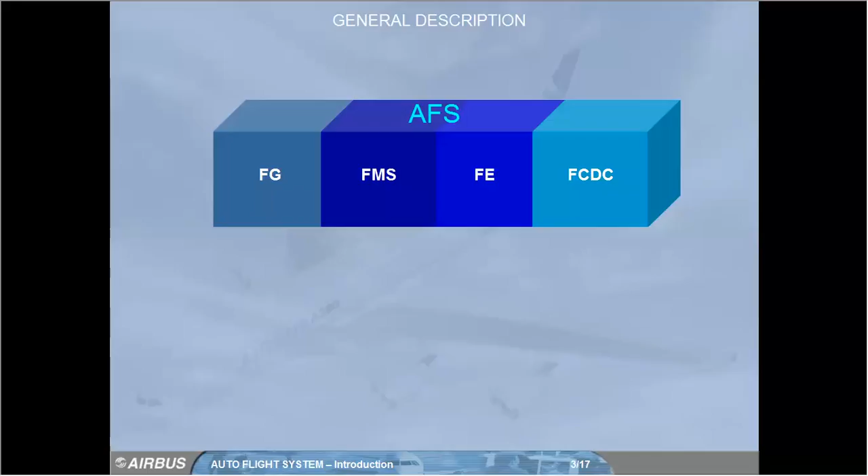The Auto Flight System includes the Flight Guidance, FG, system, the Flight Management System, FMS, the Flight Envelope, FE, and the Flight Control Data Concentrator, FCDC.

The flight guidance provides lateral and vertical guidance, including speed or Mach control, in accordance with targets selected by the flight crew, or managed by the FMS.

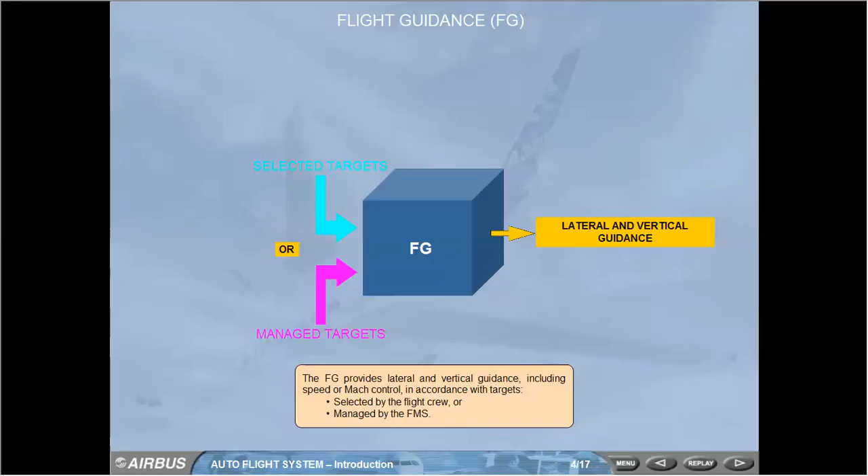To set targets, the flight crew selects inputs on the Auto Flight System Control Panel, AFSCP. These selected inputs go directly to the flight guidance for immediate guidance response. This is called selected guidance. The AFSCP is a short-term interface.

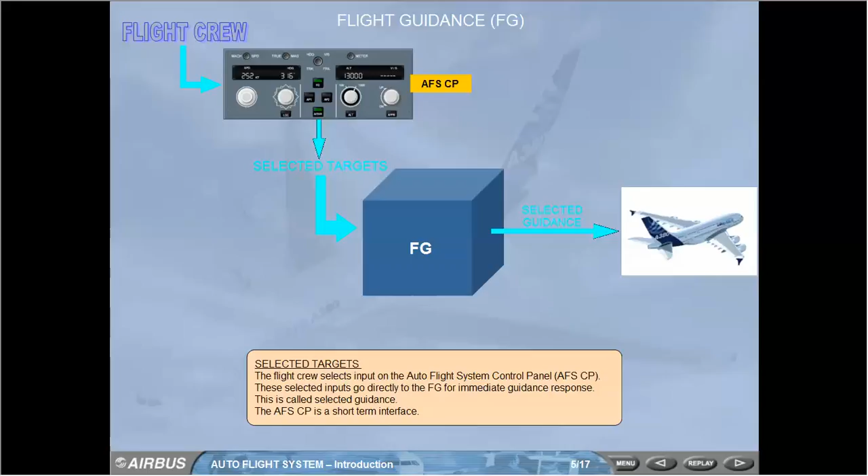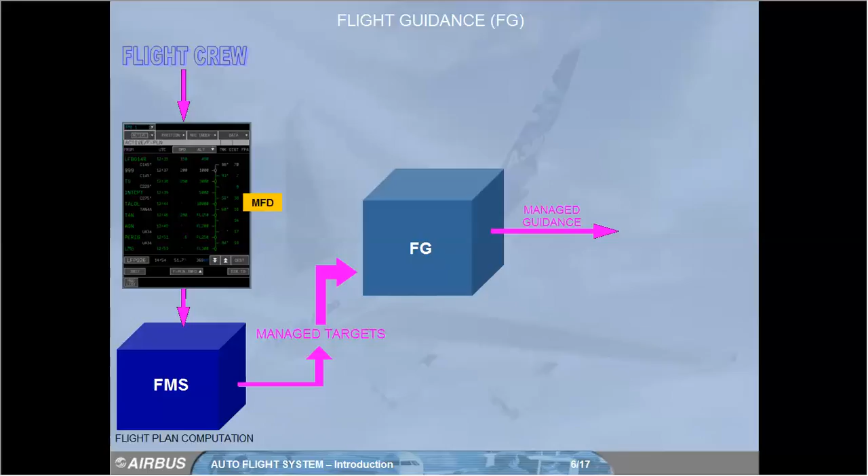The flight crew inserts the flight plan into the Multifunction Display, MFD, ahead of time. The FMS computes and manages these targets for the flight guidance. This is called managed guidance. The MFD is a long-term interface.

Lateral and vertical guidance can be either selected or managed, independently of each other. However, managed vertical guidance is not possible when selected lateral guidance is used. Note, speed or Mach can be either selected or managed, regardless of lateral and vertical guidance.

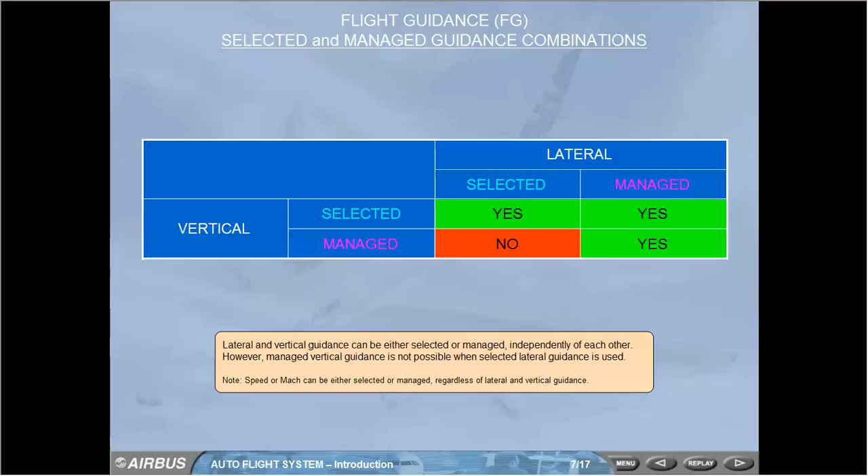On the AFSCP, the speed Mach, heading track, and altitude knobs can be turned, pulled, and pushed. This enables the flight crew to pre-select or select a target by turning, engage a selected guidance by pulling, or arm and engage a managed guidance by pushing. When in managed guidance, the flight crew can take over control at any time and change to selected guidance. Note: the vertical speed flight path angle knobs can only be turned or pulled.

The result of any action on the AFSCP or on the MFD, whether manual or automatic selection, should be confirmed on the Flight Mode Annunciator, FMA, of the Primary Flight Display, PFD.

In order to achieve lateral and vertical guidance, including speed or Mach control, the flight guidance uses the autopilot 1 and or 2, AP1, AP2, the flight directors 1 and 2, FDs, and the auto thrust.

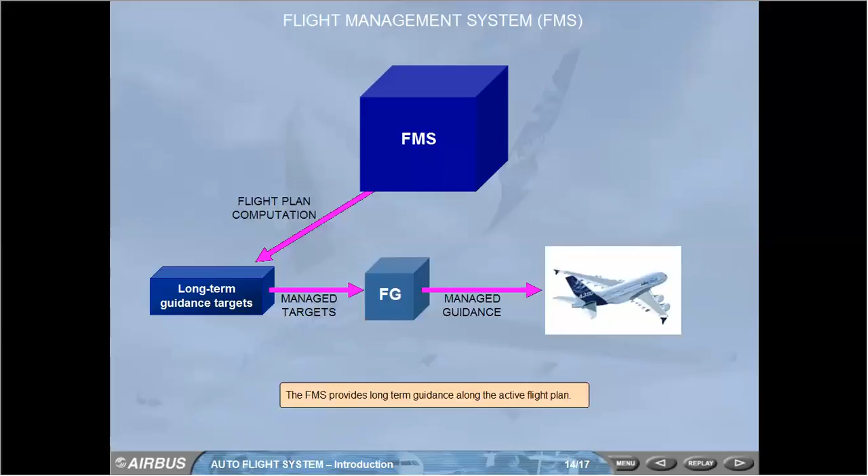The FMS provides long-term guidance along the active flight plan. In addition to long-term guidance, the FMS provides flight planning.

The flight crew can create a complete flight plan, lateral and vertical, navigation, aircraft position, position accuracy and radio navigation aids tuning, performance computation and optimization. Information is displayed on the MFD, Navigation Display, ND, and PFD.

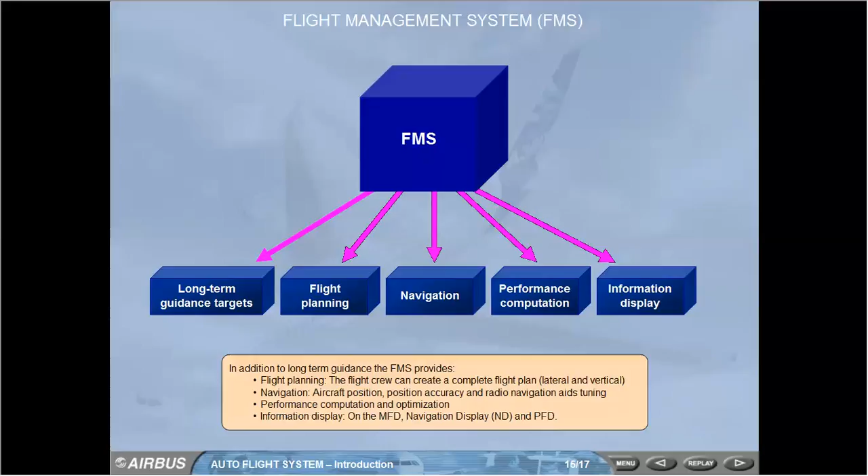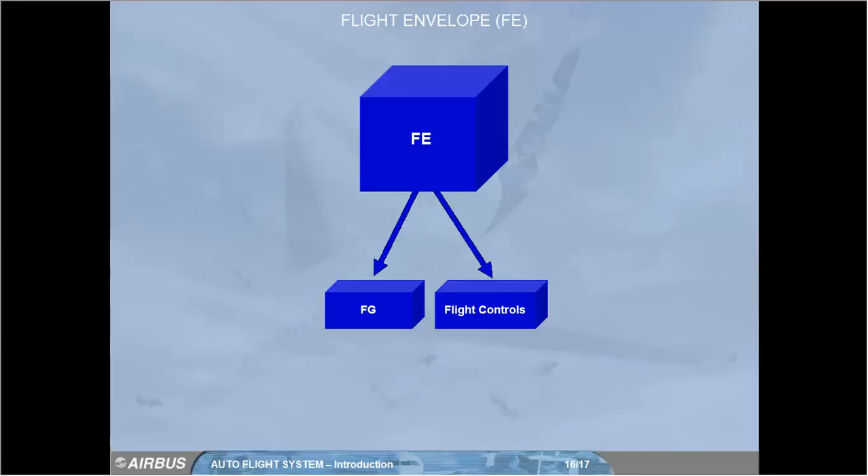The Flight Control Data Concentrator, FCDC, determines the automatic landing capability for the autoflight system, in accordance with the availability of the equipment required for automatic landing. It interfaces the autopilot, flight director and auto thrust with the Flight Warning System, FWS, to allow the associated alerts to be triggered, and generates maintenance messages for the flight guidance and flight envelope.

The FCDC also performs functions for the flight controls.

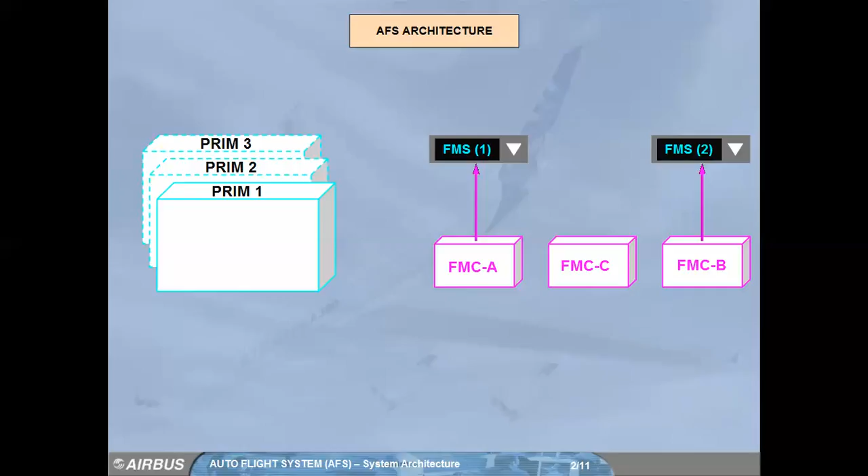The system has 3 primary flight control and guidance computers, PRIMs, and 2 flight management systems, FMS-1 and FMS-2. Each FMS is operated by one of 3 flight management computers, FMC A, FMC B, or FMC C.

The 3 PRIMs control the flight guidance, autopilots, flight directors, auto thrust, the flight envelope, FE, and the flight controls functions.

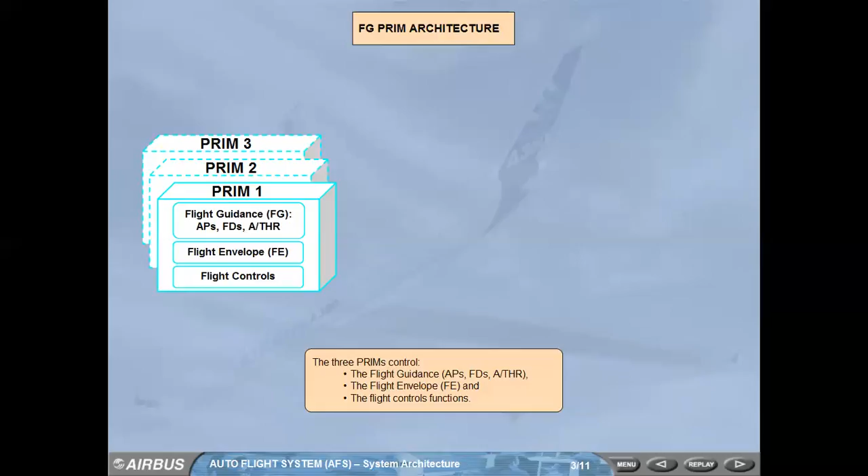A PRIM can operate one or both autopilots, the 2 flight directors, and auto thrust.

One PRIM is selected master, and the other 2 are slaves. The master PRIM is the PRIM that has the best operational capability, taking into account manual flight control law capability, flight envelope, autopilots, autoland capability, and auto thrust capability.

The master PRIM has priority to operate the engaged autopilots, flight directors, and auto thrust. If all PRIMs have the same capacity, priority is PRIM 1, PRIM 2, and then PRIM 3.

Slave 1 and 2 PRIMs are on standby, ready to control autopilots, flight directors and auto thrust.

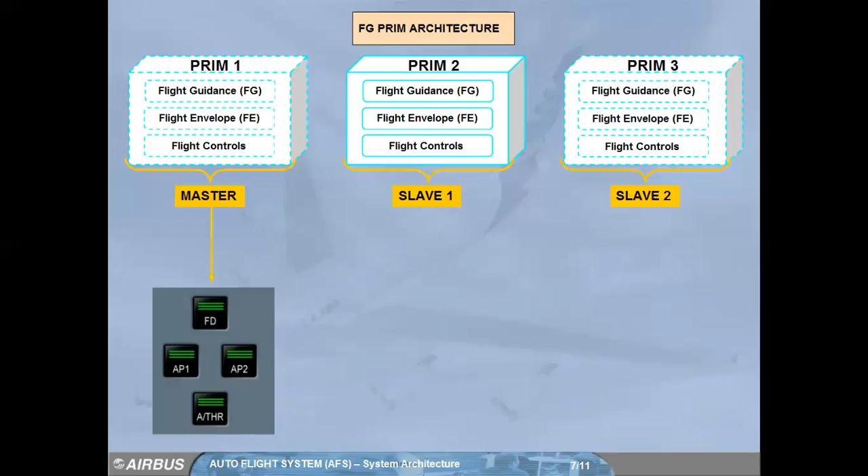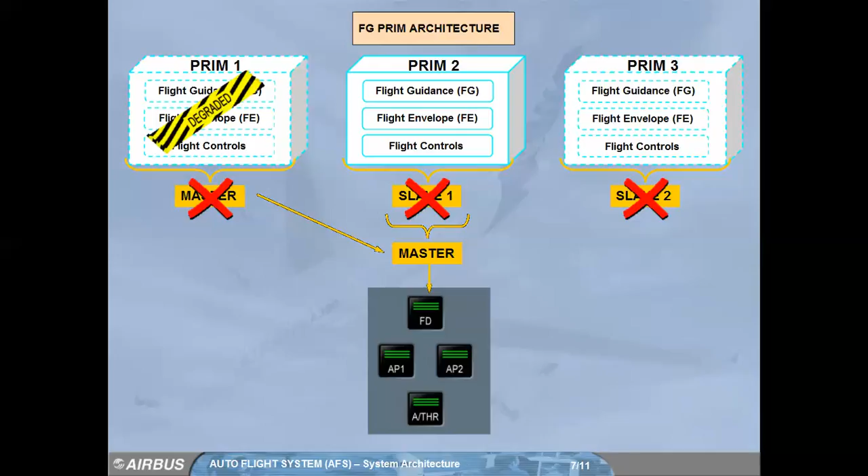If the master PRIM loses the best capability, the Slave 1 PRIM becomes the master PRIM. The engaged autopilots, flight directors and auto thrust are transferred to the Slave 1 PRIM. The two other PRIMs become Slave 1 PRIM and Slave 2 PRIM.

It interfaces with these systems. This list is not exhaustive.

There are two flight management systems, FMS, the FMS-1 on the captain's side, and the FMS-2 on the first officer's side.

In normal operation, FMC A provides data to FMS-1, FMC B provides data to FMS-2, and FMC C is on standby, ready to provide data to FMS-1 and or FMS-2.

In normal operation, if AP1 is engaged, FMC A is the master and FMC B is the slave. If AP2 is engaged, FMC B is the master and FMC A is the slave. Note: the FMC on standby is regularly updated by the master FMC.

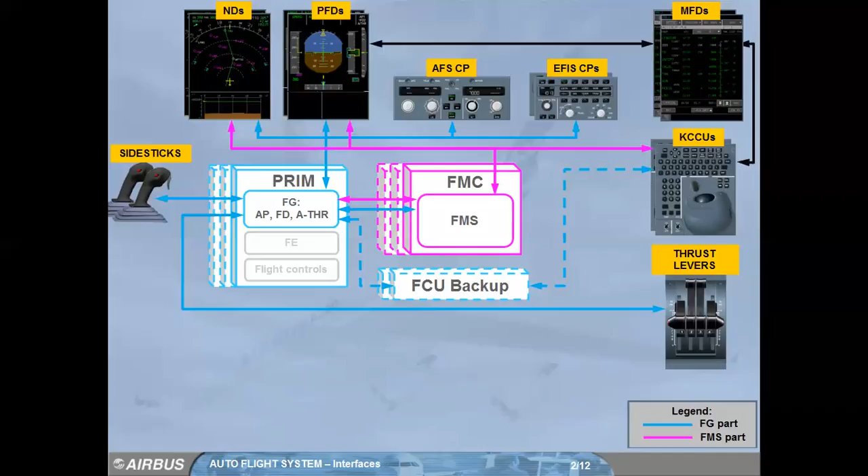Interfaces with the autoflight system via one autoflight system control panel or its related software backup on the MFDs, two multifunction displays (MFDs), two keyboard and cursor control units (KCCUs), two PFDs and their respective flight mode annunciator (FMA), two navigation displays (NDs), two EFIS CPs, one autopilot instinctive disconnect push button on each side stick, and 4 thrust levers and 2 auto thrust instinctive disconnect push buttons.

The main autoflight system interfaces are related to the flight management systems. We will describe them in the following slides.

MFDs display FMS textual data. The MFDs are the main interfaces with the FMS. They provide information on the flight plan, aircraft position, and flight performance. The MFD is also the interface for the FCU backup, surveillance system, and air traffic control (ATC).

Flight crew uses the KCCU to navigate through the FMS pages on the MFD, enter and modify data on the MFD, and do some lateral flight plan revisions on the ND.

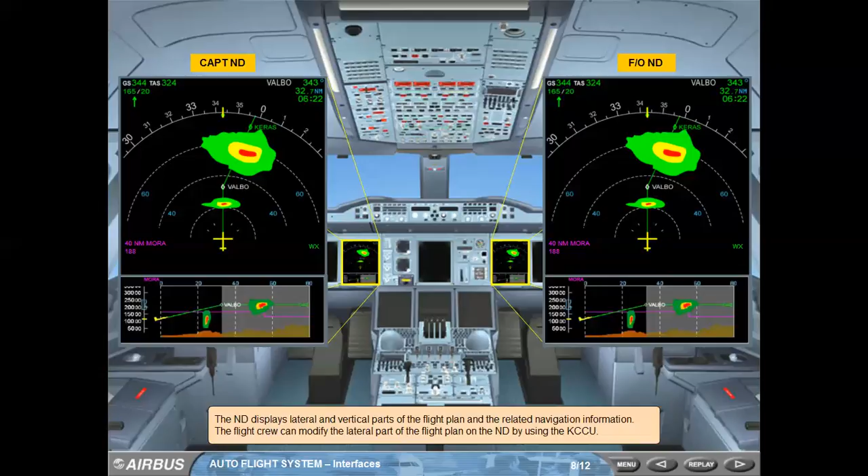With the EFIS control panel, the flight crew controls the graphical and textual FMS data displayed on the related ND.

The Auto Flight System Control Panel is the main interface with the flight guidance. Via the Auto Flight System Control Panel, the flight crew can engage managed or selected guidance, select targets for short-term guidance - speed, Mach, heading, track, altitude, vertical speed, flight path angle - and engage APs, FDs and auto thrust.

In case the Auto Flight System Control Panel fails, the MFD FCU Backup Auto Flight page provides all the Auto Flight System Control Panel functions.

Thrust levers are the flight crew interface with the auto thrust system. The thrust lever positions are sent to the PRIMs. The auto thrust then sends thrust commands to the full authority digital engine control (FADEC) system, which regulates engine thrust. When armed or active, the auto thrust can be disconnected by either of the two instinctive disconnect push buttons.

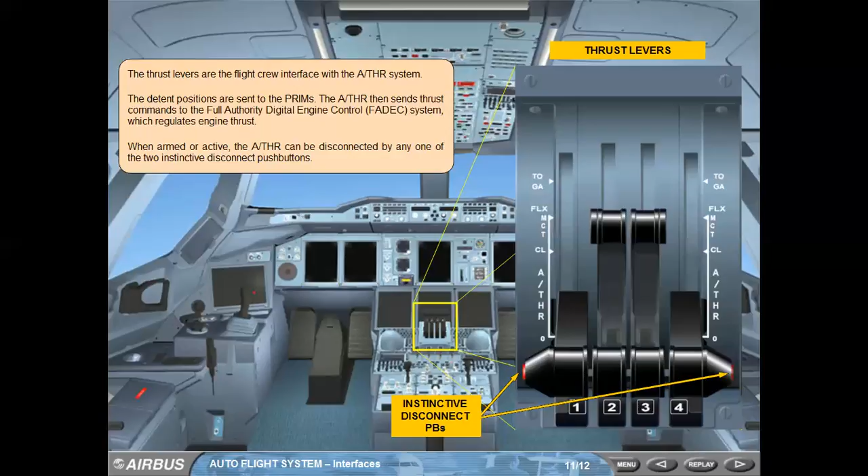The push button called the instinctive disconnect push button, located on each side stick, disengages the autopilot.

Autopilot and auto thrust are all integrated within the flight guidance. They operate in various modes in order to guide the aircraft along the lateral and vertical trajectory. Flight guidance modes appear on the Flight Mode Annunciator (FMA) of the PFDs.

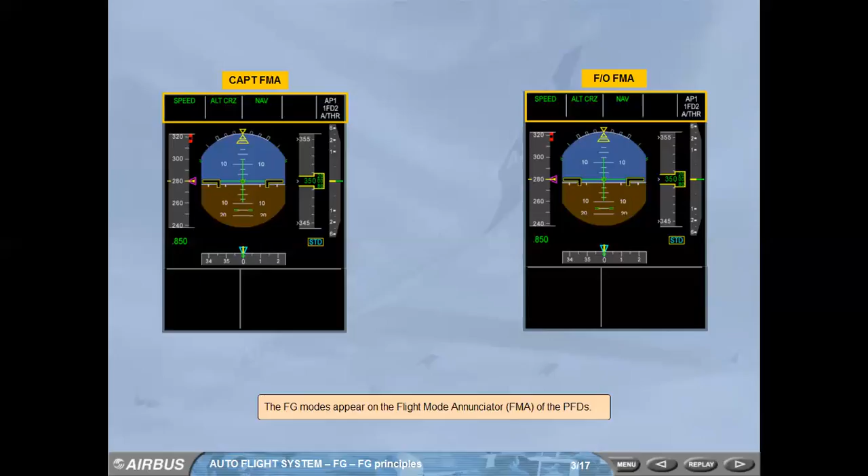The flight guidance uses AP and FD lateral modes to control the lateral trajectory, AP and FD vertical modes to control the vertical trajectory and/or speed or Mach, and auto thrust modes to control either the thrust or speed or Mach.

Some AP and FD lateral and vertical modes are linked to form common modes. A common mode fulfills the objectives of both a lateral and a vertical mode. LAND is an example of a common mode. The lateral objective is to guide the aircraft along the localizer beam, and the vertical objective is to guide the aircraft along the glide slope beam.

The FMA can display 3 lines in each column.

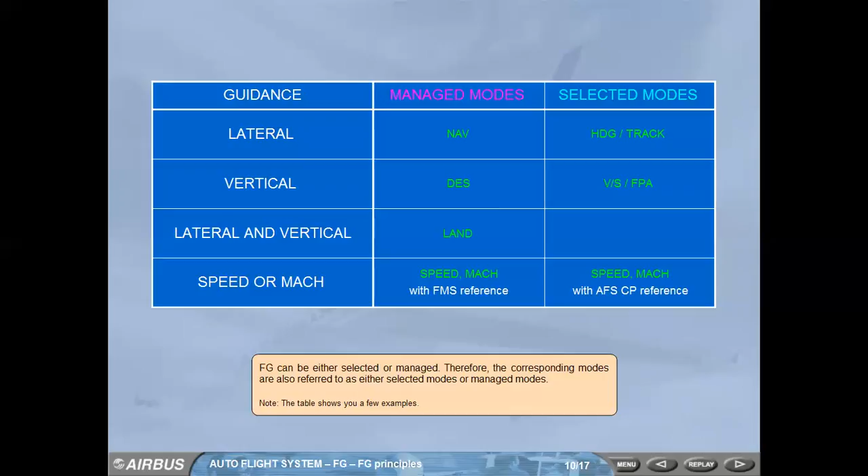AP and FD vertical mode determines the associated auto thrust mode. When an AP and FD vertical mode controls a speed or Mach target, the auto thrust mode controls thrust. When an AP and FD vertical mode controls the vertical trajectory, the auto thrust mode controls the speed or Mach target. During rollout and during flare, with the autopilot on, the auto thrust mode will control thrust at idle. If no AP and FD mode is engaged, auto thrust engages in speed or Mach mode in order to control a speed or Mach target.

Note: the table shows you a few examples.

Flight guidance mode and its associated target are managed when the flight guidance guides the aircraft according to the flight plan data computed by the FMS.

Managed by the FMS, the speed target is automatically adjusted by the FMS according to the computed speed profile. The target is displayed in magenta on the PFD.

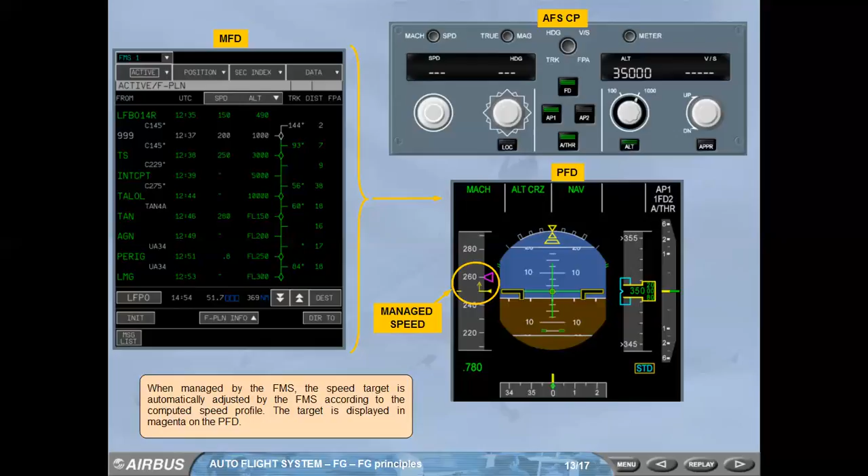Flight guidance mode and its associated target are selected when the flight guidance guides the aircraft to a target selected by the pilot on the auto flight system control panel.

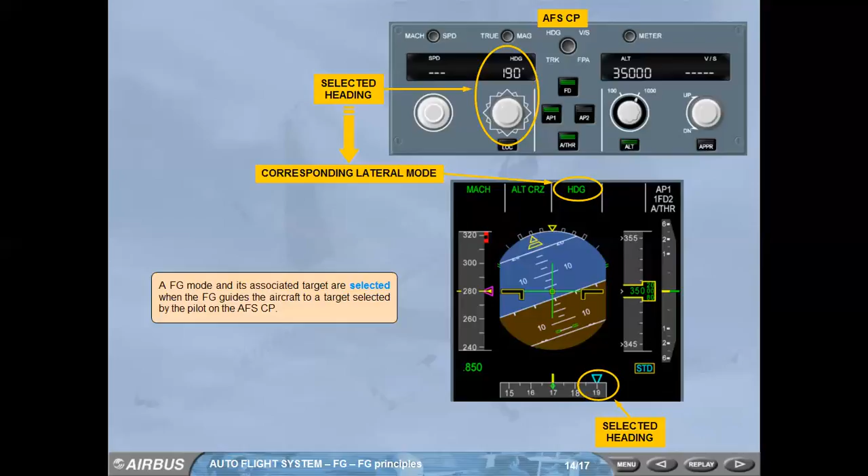When selected by the pilot on the auto flight system control panel, the speed target is used by the AP and FD, or by the auto thrust as a target. The target is displayed in blue on the PFD.

Any pilot action on the auto flight system control panel, or any automatic changes provided by the FMS, is displayed on the FMA and must be cross-checked.

The following modules will deal with each element integrated within the flight guidance: FD, AP, auto thrust.

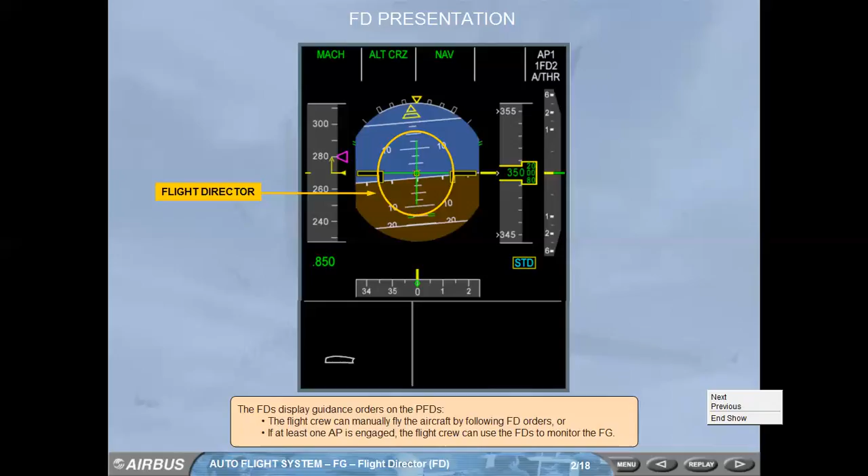FDs: FD1 on the captain's PFD and FD2 on the first officer's PFD.

The FD push button on the auto flight system control panel allows the FD bars to be displayed or removed on the PFDs. There is only one push button for FD1 and FD2.

FD1 uses data from the systems on captain's side. FD1 uses ADRS 1. FD2 uses data from the systems on the first officer's side. FD2 uses ADRS 2. When in managed mode, FD1 guidance orders are computed by using FMS1, and FD2 guidance orders are computed by using FMS2.

To engage both FDs, the following equipment must be available: 1 PRIM, 2 ADRs, 2 inertial references, the Auto Flight System Control Panel, or the Auto Flight System Control Panel backup page, and normal law or alternate law in some cases. The FDs automatically engage at aircraft's power up.

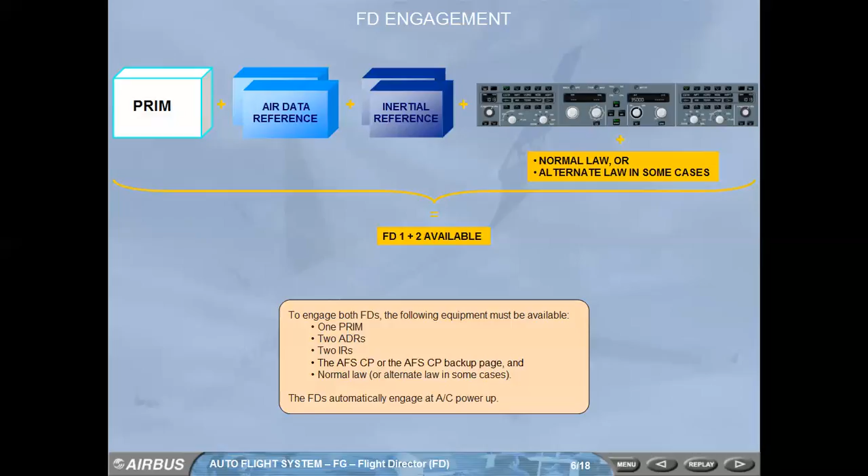When engaged, the FD push button illuminates on the Auto Flight System Control Panel. FD1, FD2 appears on both FMAs, and FD bars appear on both PFDs.

Pitch and roll bars show pitch and roll guidance orders. Below 30 feet, during landing and takeoff, when a localizer is available, the roll bar is replaced by a yaw bar that gives lateral guidance orders.

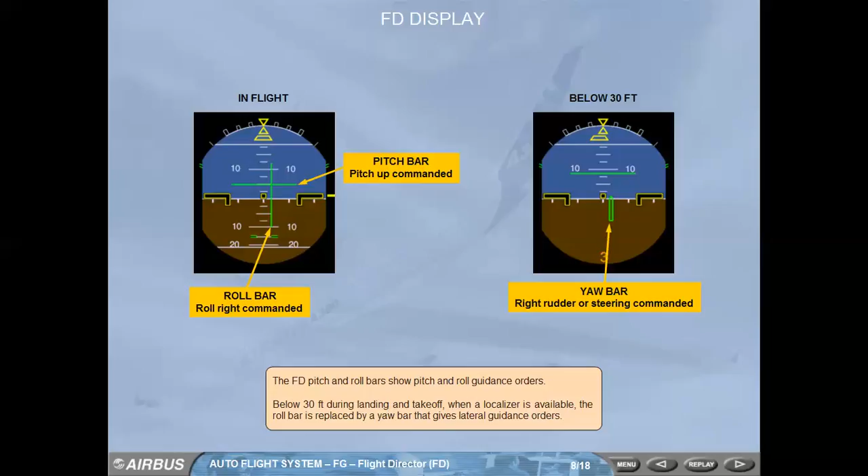The roll bar is displayed if a lateral mode is engaged. The pitch bar is displayed if a vertical mode is engaged. The yaw bar is displayed when the runway, flare, and roll-out modes are engaged, along with the pitch bar in the runway mode, along with the roll and pitch bars in the flare mode, and alone in the roll-out mode.

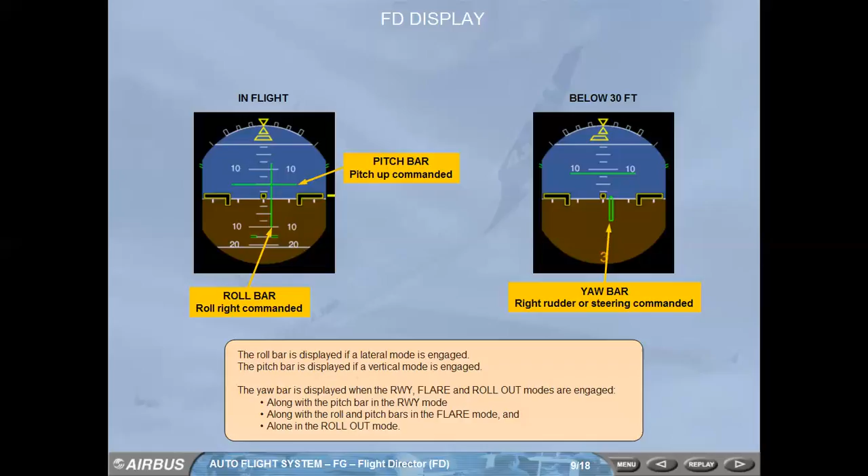If not already displayed, FD1 and FD2 are automatically displayed if go-around engages.

Switch off the FD push button on the auto flight system control panel. The FD push button extinguishes. FD1, FD2 is cleared from the FMA, and FD bars on the PFD are removed.

Switch off the FD push button on the auto flight system control panel. If no autopilot was engaged, lateral and vertical modes disengage. If the auto thrust is engaged in thrust mode, auto thrust automatically reverts to speed or Mach mode, and if one autopilot was previously engaged, the autopilot lateral and vertical modes remain engaged.

The FD bars automatically disappear if the aircraft's pitch exceeds 13 degrees down, or 25 degrees up, or the aircraft bank angle exceeds 45 degrees. The FDs, however, remain engaged, and the FD bars reappear when pitch and bank are less than those limits.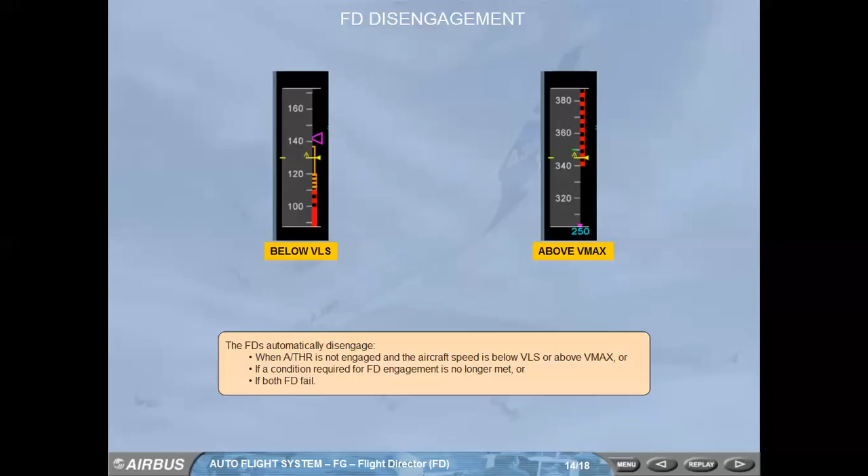The pitch and or roll bar flash for 10 seconds on both PFDs in case of reversion mode. Refer to protection chapter, or permanently flash on the respective PFD if a failure occurs in one of the equipment used for approach. For example, the ILS-1 receiver fails, or the MMR-1 fails, or the FLS function in MMR-1 fails.

Pitch, roll, and yaw orders are not available when the FDs are disengaged. A red FD flag flashes on the PFDs and then remains steady. The PFDs will not display the bars.

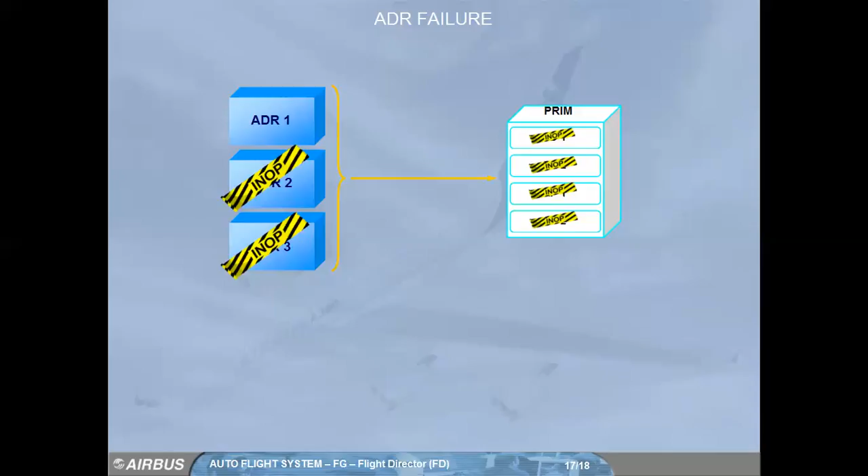A dual ADR failure leads to the loss of both APs and both FDs. Note, both FDs and both APs remain available in case of two-prim failure.

When FD2 is lost, FD1 appears on both FMA; when FD1 is lost, FD2 appears on both FMA.

Generates pitch, roll, yaw orders to stabilize the aircraft, control the lateral and or vertical trajectory of the aircraft, control the speed or Mach of the aircraft, coordination with the auto thrust, and perform automatic landing and go around. Only one autopilot operates at a time.

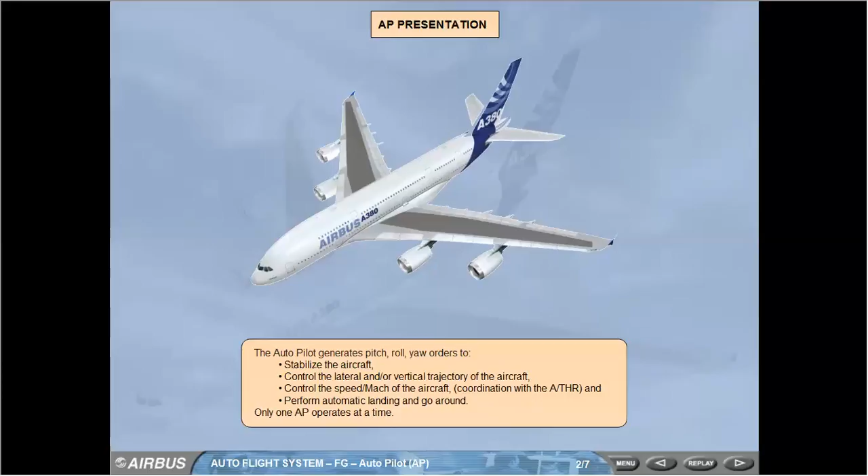One autopilot engages when the flight crew presses AP1 or AP2, if the aircraft has been in flight for more than 5 seconds and the aircraft's pitch angle, bank angle, and speed are within operational limits.

On Autopilot 1 or 2 engagement, the Autopilot 1 or 2 push-button light on the auto flight system control panel illuminates, and both FMAs confirm the autopilot engagement, Autopilot 1 or Autopilot 2.

When one autopilot is engaged, the flight crew can engage the second autopilot by pressing the corresponding autopilot push button, once the approach mode is armed or active, or when the go-around mode is engaged. When both autopilots are engaged, Autopilot 1 is active and Autopilot 2 is on standby, regardless of the order of autopilot engagement.

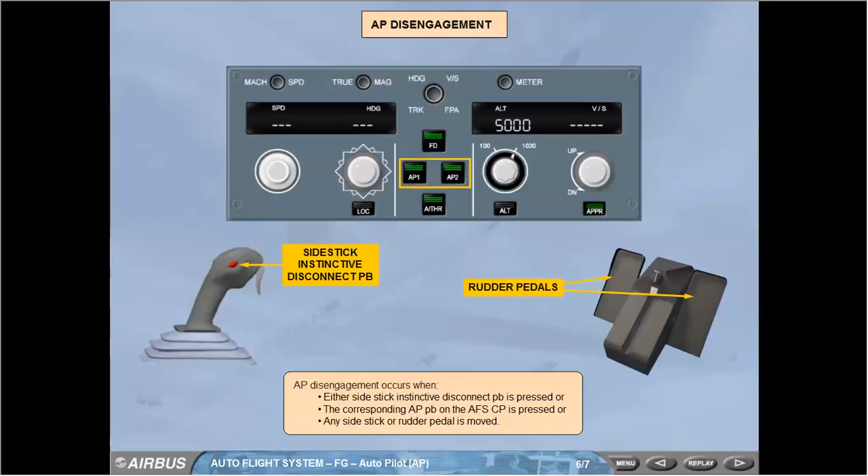One way to disconnect the autopilot is by pressing the side stick instinctive disconnect push button twice. Pressing it once disconnects the autopilot and triggers the following temporary warnings.

The autopilot off memo appears on the PFDs and on the engine warning display. A low volume cavalry charge sounds, and the master warning light illuminates. Pressing the side stick instinctive disconnect push button a second time extinguishes all lights.

The auto thrust can work in two different modes: speed or Mach mode, or thrust mode. When in speed or Mach mode, the auto thrust continuously adjusts the thrust in order to maintain a speed or Mach target, for example during cruise or approach.

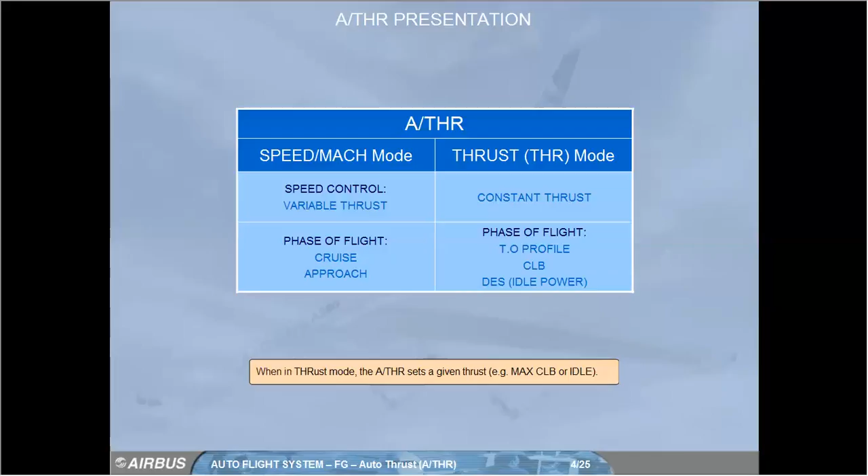In thrust mode, the auto thrust sets a given thrust, for example, maximum climb or idle.

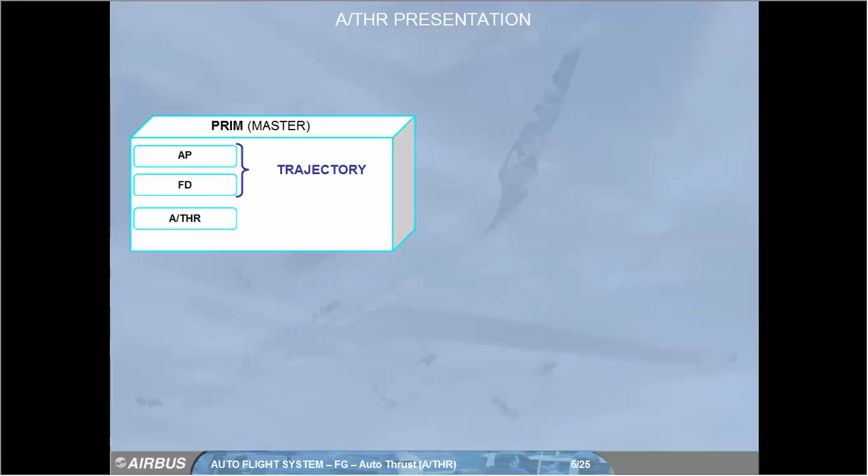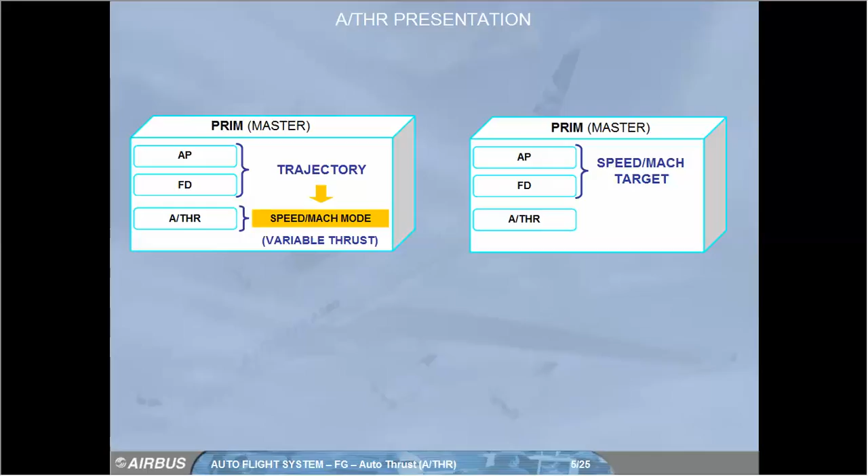Auto thrust modes are automatically linked to autopilot and, or flight director vertical modes. When autopilot or flight director vertical mode controls a trajectory, for example altitude hold, vertical speed, glide slope, the auto thrust is in speed or Mach mode. And when autopilot or flight director vertical mode adjusts the aircraft pitch in order to keep a target speed or Mach, for example climb, descent, the auto thrust is in thrust mode.

Auto thrust computes an N1 target that is sent to the FADECs.

Each lever position corresponds to a given thrust limit. There are four detents: idle, climb, flex MCT, and toga.

The flight crew uses the thrust levers to arm, activate, and disconnect the auto thrust, engage the takeoff and go around vertical mode, SRS, manually select the thrust of each engine when the auto thrust is disconnected, or engage reverse thrust on engine 2 and 3.

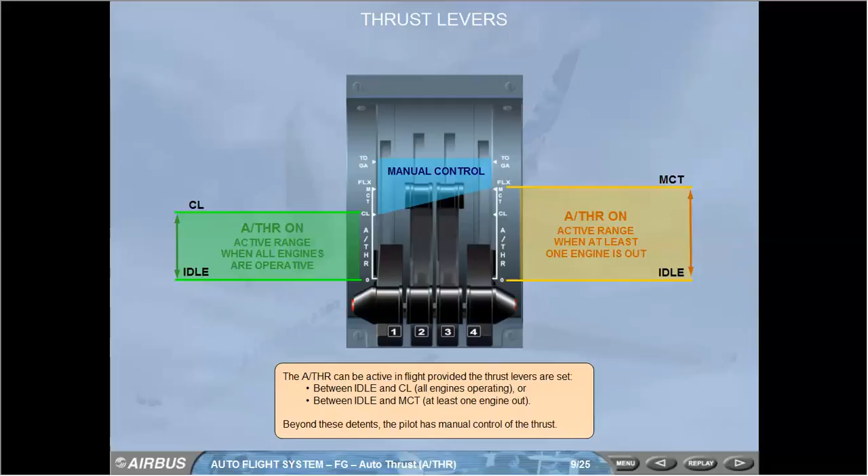Auto thrust is either armed, blue indication, active, white indication, or disconnected, no indication.

When the auto thrust is disconnected, the flight crew controls the thrust using the four thrust levers. Then, each of the four thrust commands is sent to its respective FADEC.

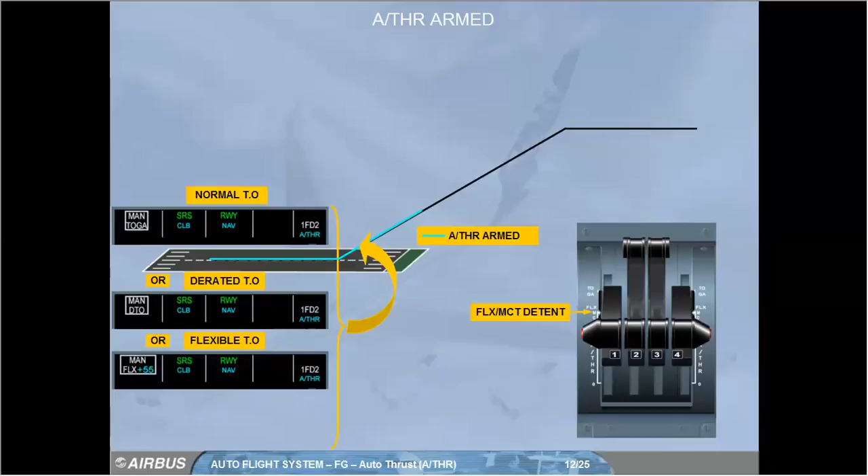Auto thrust arms during takeoff, when the thrust levers are set to toga or flex, MCT detente, in accordance with toga, flex or derated selection on the takeoff panel of the FMS performance page. Note: auto thrust also arms when go-around mode engages.

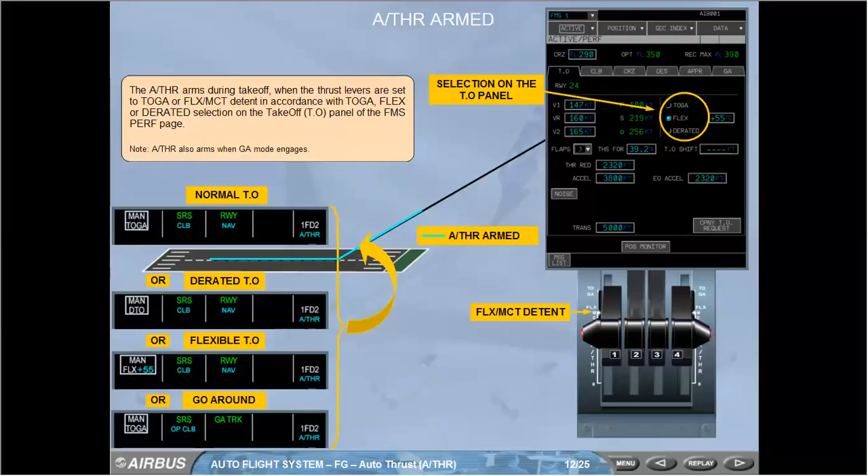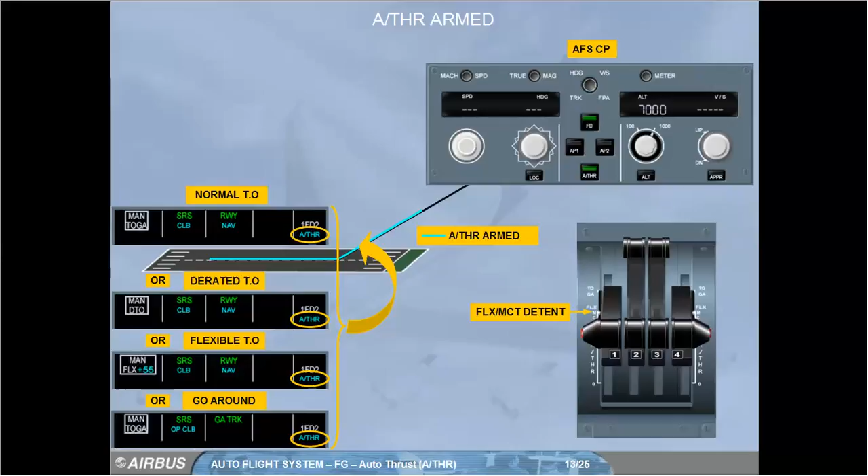Armed auto thrust indication appears in blue on the FMA. The first column of the FMA displays the selected thrust, and the auto thrust push button illuminates on the auto flight system control panel.

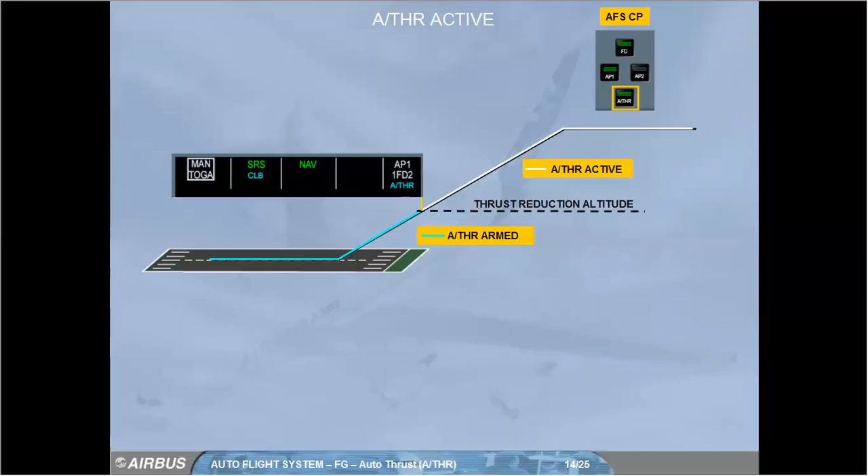Auto thrust becomes active at the thrust reduction altitude when the crew sets the thrust levers to climb detente, or MCT flex detente, if at least one engine is out. When active, auto thrust is displayed in white on the FMA.

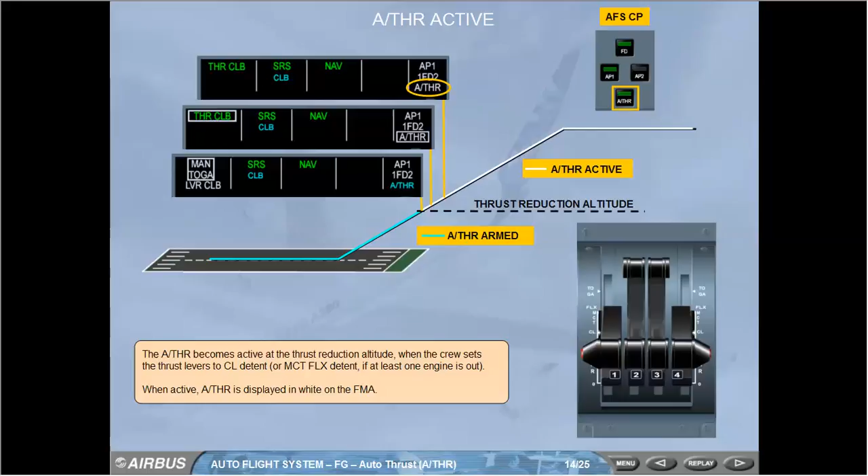Auto thrust becomes active if the auto thrust is armed and the flight crew sets the thrust levers on the active range, or the flight crew presses the auto thrust push button on the auto flight system control panel with the thrust levers in the active range or at the idle position.

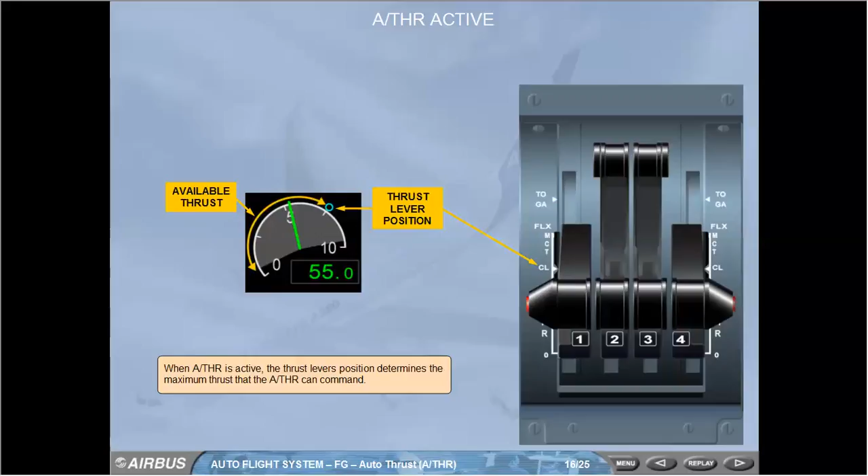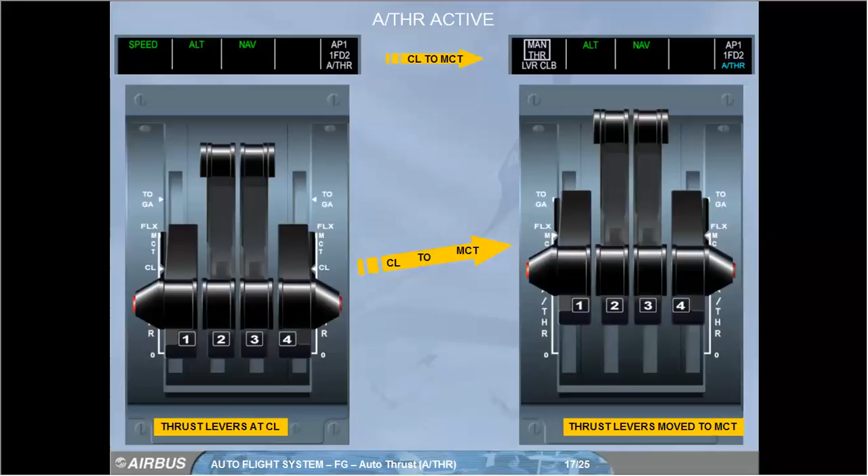When auto thrust is active, the thrust lever's position determines the maximum thrust that the auto thrust can command. The pilot can at any moment set additional thrust by pushing the thrust levers forward from the climb détente. On the FMA, auto thrust is displayed in blue, armed, and lever climb is flashing.

Set the thrust levers below climb détente. Maximum available thrust is limited by the lever's position. In this case, an auto thrust limited alert triggers. Thrust lever is displayed on the first column of the FMA, and lever climb, or lever MCT in engine out configuration, flashes on the first column of the FMA.

Lever asymmetric message flashes on the first column of the FMA when the auto thrust is active, and at least one thrust lever is out of the climb détente when all engines are operative.

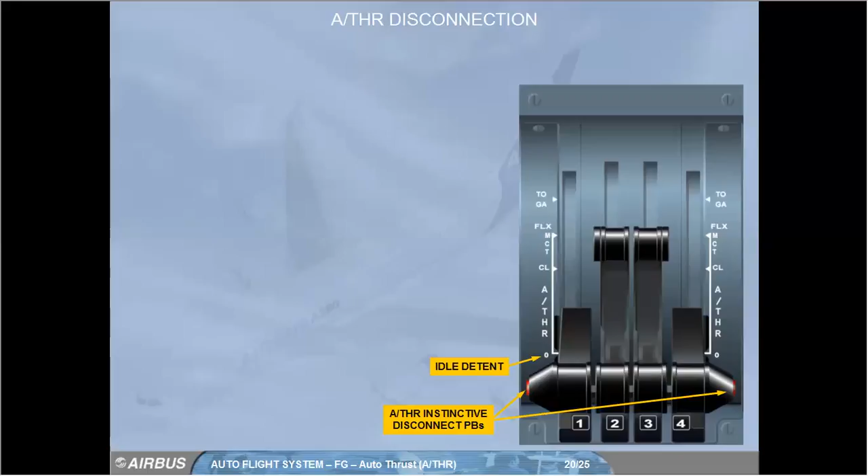Auto thrust disconnects when the flight crew presses either auto thrust instinctive disconnect push button, the flight crew sets all thrust levers at the idle detent, or the flight crew presses the auto thrust push button on the auto flight system control panel. When the auto thrust disconnects, the engine thrust target corresponds to the thrust lever position.

Auto thrust also disconnects when the auto thrust becomes inoperative. In this case, the engine thrust target is frozen at the current thrust.

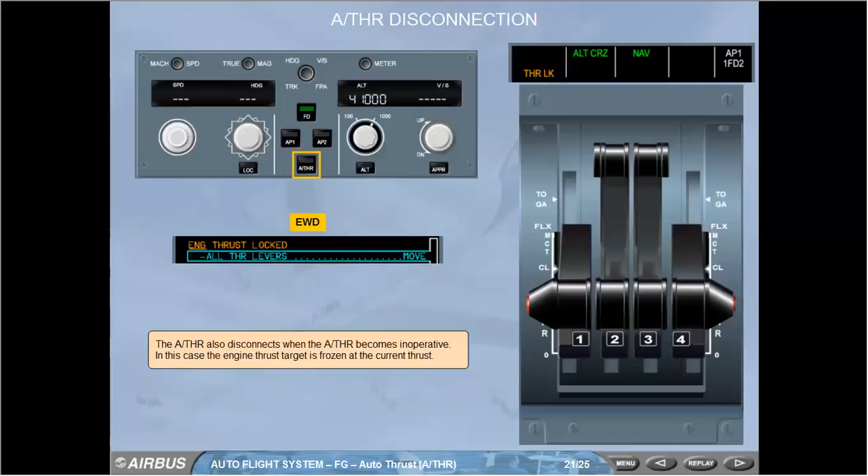If the flight crew presses and holds one auto thrust instinctive disconnect push button for more than 15 seconds, the auto thrust will be lost for the remainder of the flight. All auto thrust modes will be lost.

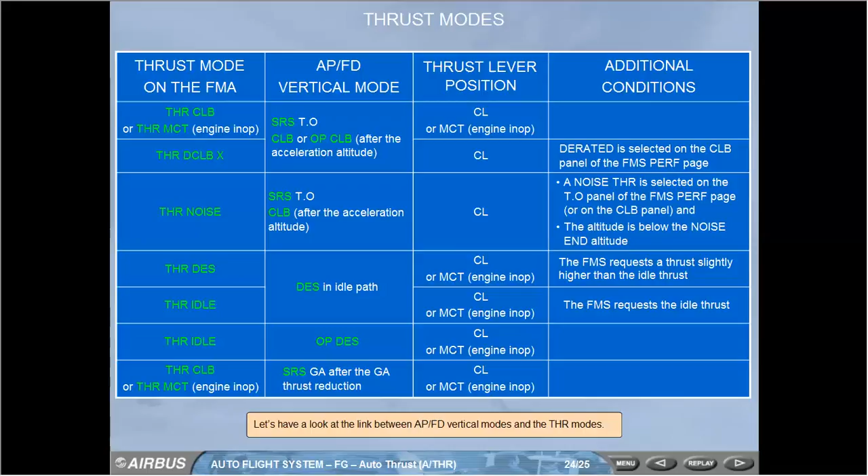Have a look at the link between autopilot, flight director vertical modes, and the thrust modes. Have a look at the link between autopilot, flight director vertical mode, and the speed or Mach mode.

Control is managed when the target comes from the FMS, or selected when the target has been selected on the auto flight system control panel. In flight, either the APFD or the auto thrust can acquire and hold a speed Mach target. The speed Mach control is managed when the target comes from the FMS, or selected when the target has been selected on the auto flight system control panel. In flight, either the APFD or the auto thrust can acquire and hold a speed Mach target.

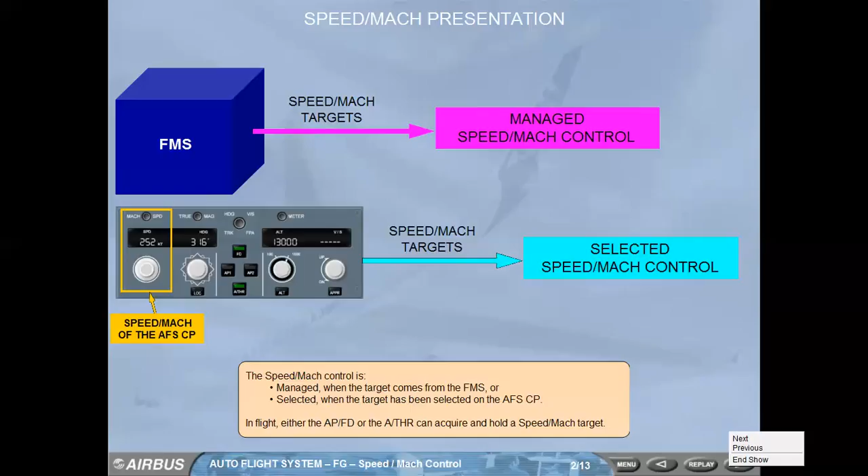Automatic switching when the crossover altitude is reached. During climb, the speed target, selected or managed, changes automatically to the related Mach target, and, during descent, the Mach target, selected or managed, changes automatically to the related speed target. Note: the crossover altitude is at approximately 30,000 feet based on the Econ Mach value.

Manual switching. The flight crew can switch from speed to Mach by pressing the Speed Mach push button on the Auto Flight System control panel.

Speed Mach target is managed. The Speed Mach window on the Auto Flight System control panel displays dashes. A magenta triangle on the PFD airspeed scale indicates the managed speed target, or the related speed of the managed Mach target.

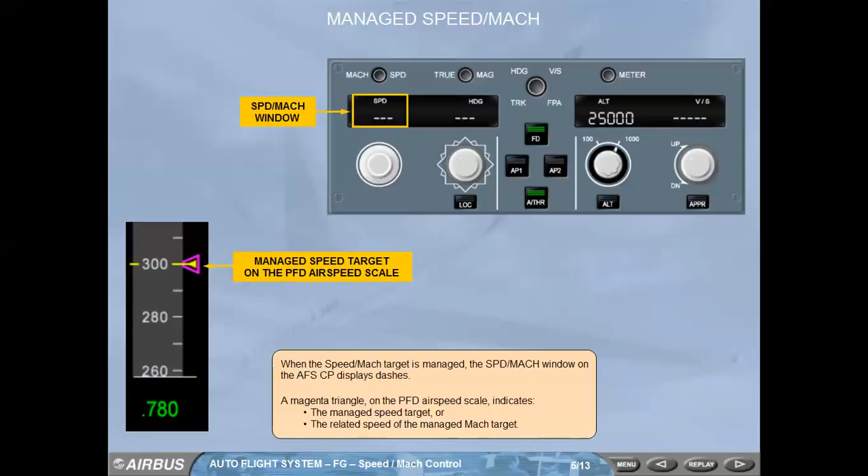Managed speed Mach becomes active on ground when V2 is inserted on the takeoff panel of the FMS performance page and takeoff speed reference system engages, or in flight, when the flight crew pushes the speed Mach rotary knob on the Auto Flight System control panel if a managed speed Mach target is available. Note: speed Mach is also managed during go-around.

The speed Mach is no longer managed and reverts to selected if the flight crew selects a speed Mach target by pulling the speed Mach rotary knob on the Auto Flight System control panel. The flight crew has pre-selected a speed Mach on the climb or cruise panel of the FMS performance page, and the related FMS flight phase engages, all APs and FDs disengage, and the FMS flight phase is not the approach phase, or the managed speed Mach target is lost.

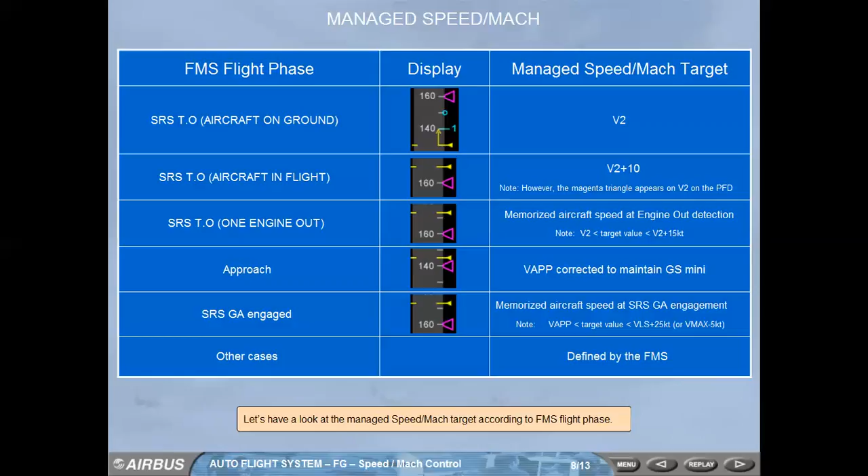Mach target is selected. The speed Mach window on the Auto Flight System control panel displays the target. A blue triangle on the PFD airspeed scale indicates the selected speed target, or the related speed of the selected Mach target.

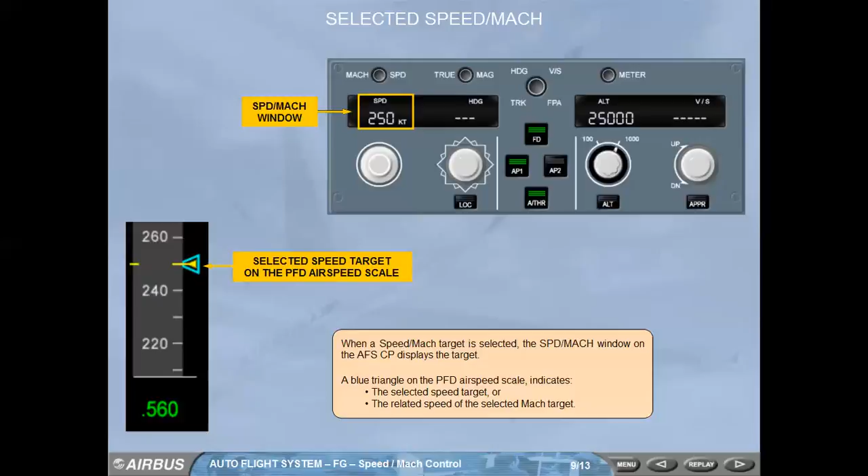Selected speed has priority over managed speed. The only automatic change from selected to managed speed Mach target occurs at go-around engagement. If the situation calls for managed speed Mach, both PFDs and both MFDs display a message that proposes a manual change to managed speed or Mach.

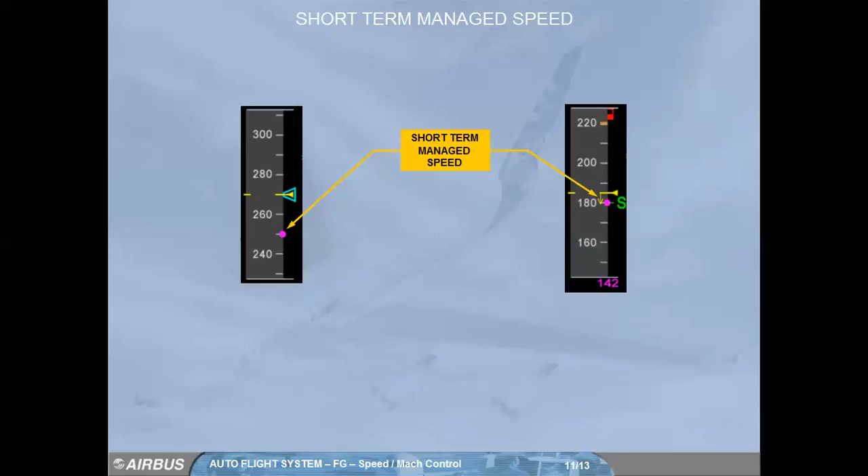Short-term managed speed target may appear when the speed Mach is either managed or selected. This speed is indicated by a magenta dot on the PFD airspeed scale.

A managed speed is displayed. The magenta triangle, or digital value, represents the long-term managed speed target, but doesn't take into account the aircraft configuration. Therefore, the current speed target used to command the aircraft is the short-term managed speed that is represented by a magenta dot.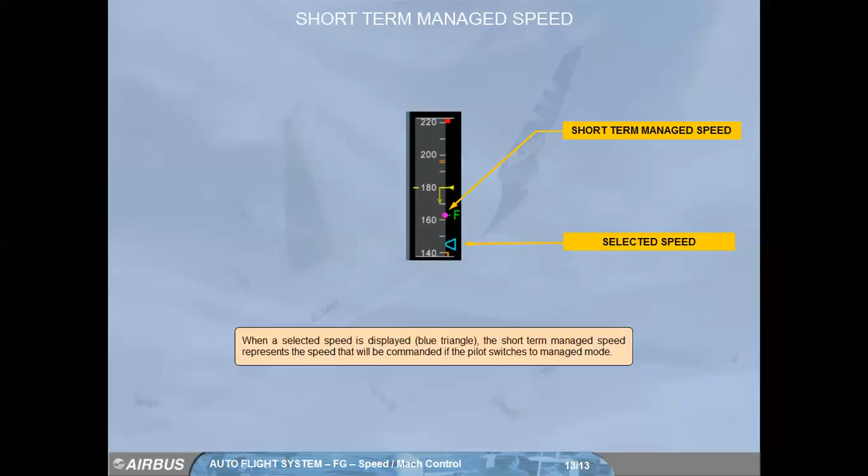When a selected speed is displayed, blue triangle. The short-term managed speed represents the speed that will be commanded if the pilot switches to managed mode.

The AP/FD TCAS concept is to combine the auto flight system, AFS, with the traffic collision and avoidance system, TCAS, to provide vertical speed guidance with autopilot and/or flight directors based on TCAS orders.

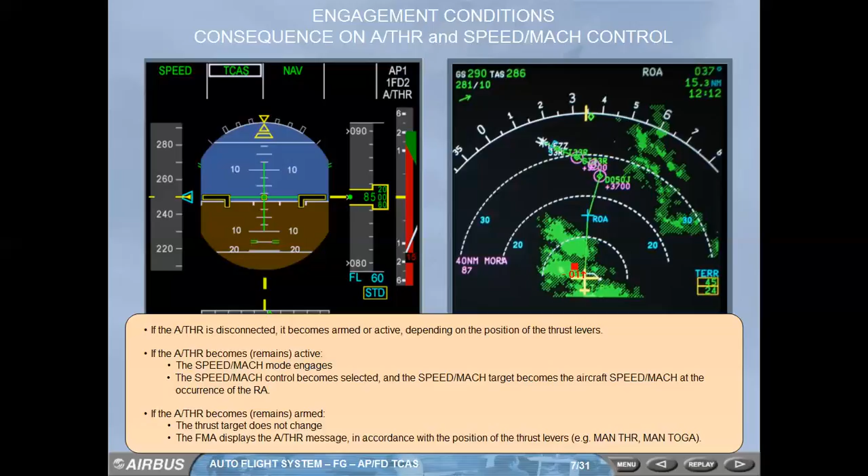APFD TCAS mode engagement: when the auto thrust is armed, the lever climb message may flash on the FMA. If the vertical speed order of the RA is above 500 feet per minute, the lever climb message is inhibited. However, if the speed exceeds VFE-20 knots, the lever climb message flashes on the FMA.

If the vertical speed order of the RA is equal to or below 500 feet per minute, the lever climb message flashes on the FMA.

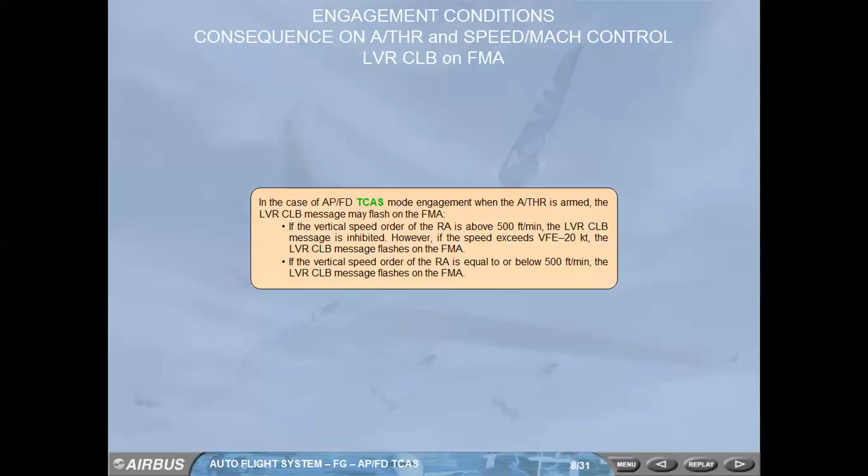Any engaged or armed APFD lateral mode remains engaged or armed. Note: if both AP and FD are disengaged, when the APFD TCAS mode engages, heading automatically engages. The heading target is the aircraft heading at heading engagement.

The armed APFD vertical mode disarms, except Alt cruise, if the altitude capture is compatible with the RA order.

On the resolution advisory and the AFSCP selected altitude, the APFD TCAS mode uses the guidance law of one of the following modes: vertical speed (VS) in this example, or altitude acquire, or altitude hold. Note: altitude acquire and hold guidance will be explained later on in this module.

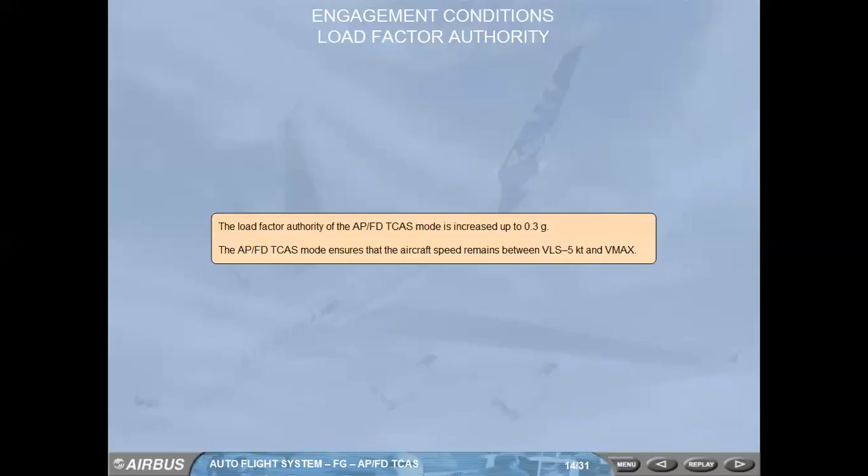Clear of conflict aural alert sounds. The APFD TCAS mode automatically disengages and reverts to armed mode, TCAS, as long as the intruder remains within the TA range.

The APFD TCAS mode reverts to vertical speed mode. The vertical speed target becomes plus or minus 1,000 feet per minute, which leads the aircraft toward the AFSCP selected altitude.

Alt arms. A triple click aural alert sounds, and the pitch bar flashes for 10 seconds. Note: the vertical speed target becomes 500 feet per minute if the aircraft is at or above 30,000 feet, and the AFSCP selected altitude is above the aircraft.

Intruder becomes white on the ND. The APFD TCAS mode disarms.

The AP/FD TCAS mode also automatically disengages if one of the following occurs: the TA-only mode is manually or automatically selected, or the standby mode of the TCAS is selected, or the ECAM triggers the AP/FD auto flight TCAS mode fault alert, or the flight crew engages another AP/FD vertical mode, for example in the case of a go-around.

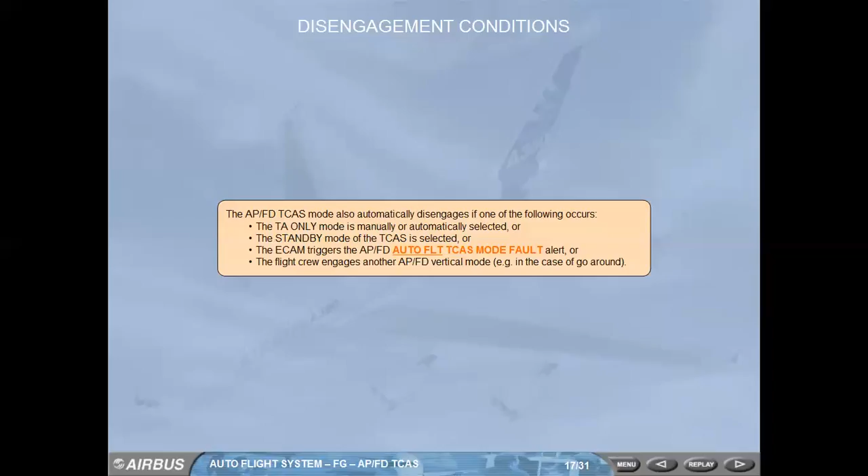In the next slides, we will see some examples of preventive and corrective RA.

Example: a preventive TCAS RA, monitor vertical speed, has been triggered. The TCAS mode engages and maintains the current aircraft vertical speed using the Alt Law. The lateral mode, for example localizer, is maintained. Note: if glide slope is armed when the AP/FD TCAS mode engages, glide slope disarms. The approach push button comes off, and the localizer push button comes on.

The aircraft is initially in cruise and experiences a corrective TCAS RA: climb, followed by adjust vertical speed, adjust, aural warning.

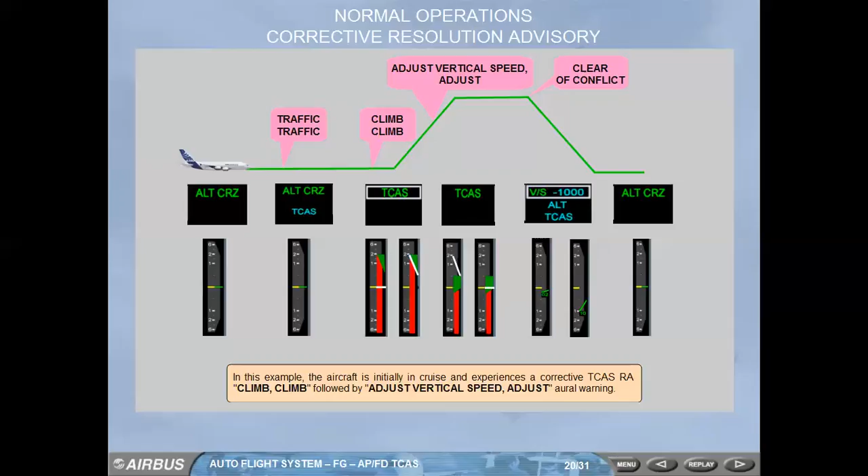Alt cruise is armed. In the case of corrective adjust vertical speed adjust, or preventive monitor vertical speed, the capture of the selected altitude is allowed under TCAS mode if the level is reached before the clear of conflict, using the Alt Star law.

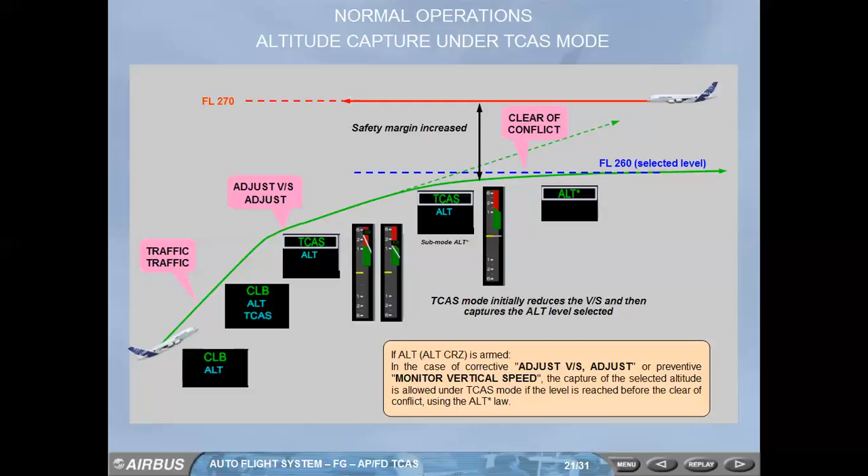The flying reference is track FPA when AP/FD TCAS mode engages. The flying reference automatically becomes heading vertical speed. When the AP/FD TCAS mode disengages, the FMA displays a track FPA deselected message for 10 seconds on the third line.

TCAS mode arming and engagement are inhibited when the TCAS is selected in TA-only mode, either manually by flight crew action or automatically if below 900 feet radio altitude, or when wind shear, stall, or TAWS alerts are triggered, or when the TCAS is in standby mode. In the next slides, we will see some examples of inhibitions.

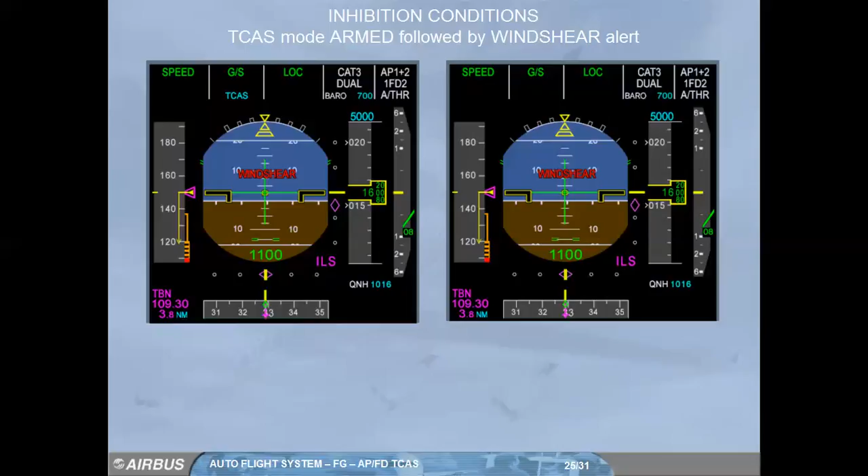Case of a wind shear alert: the AP/FD TCAS mode disarms due to the automatic TA-only mode selection. HUD option: in the case a wind shear alert is triggered, a wind shear message appears on the HUD combiner. For additional information on the HUD, refer to the A380 HUD presentation.

TA-only or standby mode of the TCAS is automatically or manually selected during an RA. The AP/FD TCAS mode automatically disengages and all the following occur simultaneously. The AP/FD engagement status does not change.

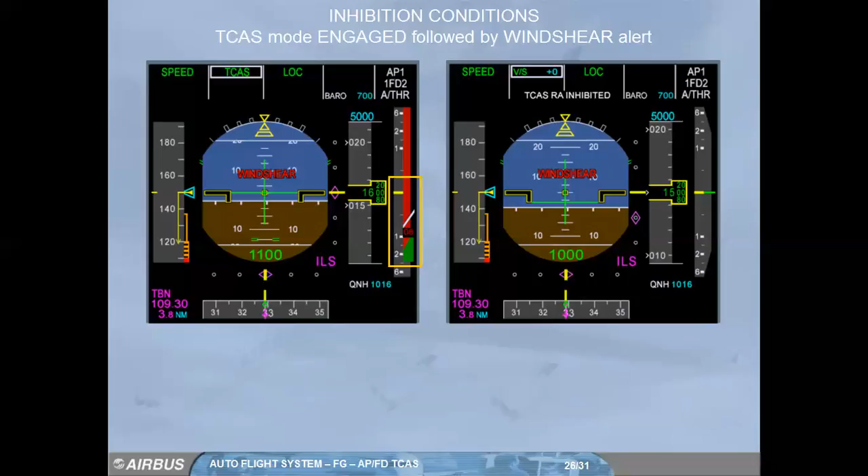The AP/FD TCAS mode reverts to vertical speed mode. The vertical speed target is the vertical speed target value at TCAS mode engagement if positive, or 0 feet per minute if the RA was to descend. A triple click aural alert sounds and the FD pitch bar flashes for 10 seconds.

The AP/FD lateral mode is maintained. The FMA displays a TCAS RA inhibited message on the second and third columns of the third line.

The AP/FD TCAS mode is not available. The ECAM displays the auto flight TCAS mode fault alert. Note: do not confuse this with the SURV TCAS 1+2 fault alert, which occurs when the TCAS system fails.

Flight crew uses the HUD. When a TCAS RA is triggered, the flight crew must revert to the PFD. A TCAS RA, revert to PFD message appears on the HUD combiner. For additional information on the HUD, refer to the A380 HUD presentation.